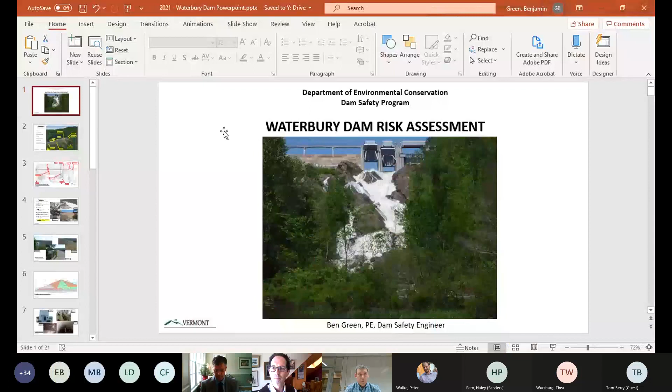Sure, so I'm going to share my screen here. Hopefully everyone can see that. If I get a thumbs up from you, Neil, maybe that's the first I can see right now on my screen. Yeah, so my name is Ben Green. I'm the Chief Dam Safety Engineer for the DEC Dam Safety Program, and this presentation today is about the Waterbury Dam. It will provide some historic information on the dam, a virtual tour of sorts, and discuss some of the preliminary findings of the risk assessment that's currently underway.

As I mentioned, I work for the Dam Safety Program. We're a small program of just 2 engineers in the Water Investment Division within DEC, and we are the caretaker and owner representative at Waterbury Dam, as well as 13 other state-owned dams, including its sister flood control dams, Wrightsville Dam and East Barre Dam. In addition to the dam ownership piece, we also are dam regulators and regulate about 1,000 non-powered, non-federal dams statewide.

As mentioned before, this risk assessment is kind of the first step in a project to address deficiencies at the spillway of Waterbury Dam, which were first identified in the early 2000s. And this work is currently being performed by the good folks at the New England District of the Army Corps of Engineers. I would like to offer to anyone who'd like to learn more beyond this presentation, I'd be happy to, once COVID slows down and the snow's off the dam, maybe later this year, provide a site visit, site tour. Doing this kind of thing online is a little challenging, and if a picture's worth 1,000 words, I think a site visit is probably worth 1,000,000 on a project like this.

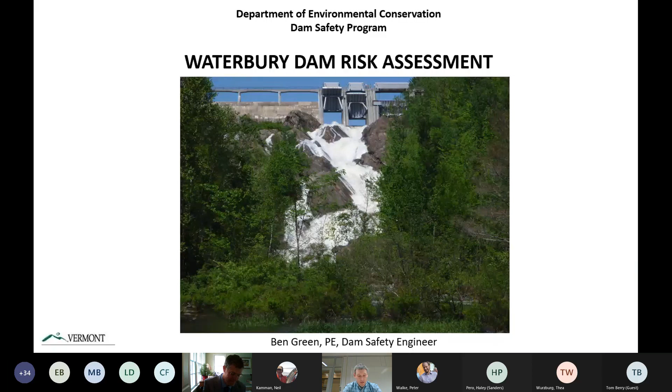So from there, I just want to give a brief overview of the dam. For those not familiar, it is located on the Little River in Waterbury. The drainage area, or area that flows to the dam, is about 109 square miles, and that's mainly located to the north of the dam, with the peak of Mount Mansfield, Vermont's highest peak, as the northern divide. The dam is 187 foot tall and 2,100 feet long.

I'd just like to note a few things in this image here. Hopefully you can see my cursor. This main portion of the dam is called the embankment. Over at this far end is a spillway section that includes 2 components, a gated and ungated spillway section. This red dashed line through the embankment here is meant to show an outlet tunnel that conveys water from the reservoir through the dam and down to Green Mountain Power's hydro plant, as well as a bypass pipe that the state owns. Those are some of the key components. Just to the side of this dashed line, and I'll show it more in the next plan, but it's kind of the original alignment of the river through the dam was through this maximum section right here.

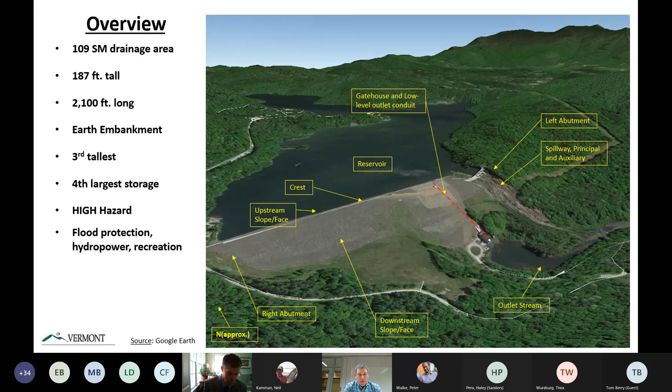The dam is the 3rd tallest dam in the state and the 4th largest from a storage capacity standpoint. So it's a very major dam for Vermont, and it's certainly the largest owned by the state. As mentioned previously, it's a high hazard potential dam, meaning in the event of a failure, it's anticipated there would be loss of life. And the uses of the dam were alluded to earlier: flood protection, hydropower, and recreation.

This slide is from a 1950s plan put together by the Army Corps of Engineers for the dam, showing it in a different light than the previous image. Here on the right end of this image are the two components of the spillway system: the gated portion, known as radial arm gates or Tainter gates, and the ungated section to the left. The dashed line through the dam represents the tunnel that conveys water from upstream to downstream, and on the crest is the gatehouse that intersects that tunnel. At the downstream terminus is Green Mountain Power's plant, as well as a state bypass not well shown in this image.

I'd also like to point out this shaded area, which is actually the original river alignment prior to dam construction at the site. I show this because it's important to understand as you look at this dam. This river alignment is basically a gorge, a cut through bedrock that the river made underneath where the dam is now located. It's been a historic weak point, so understanding what that looks like is important to the overall project.

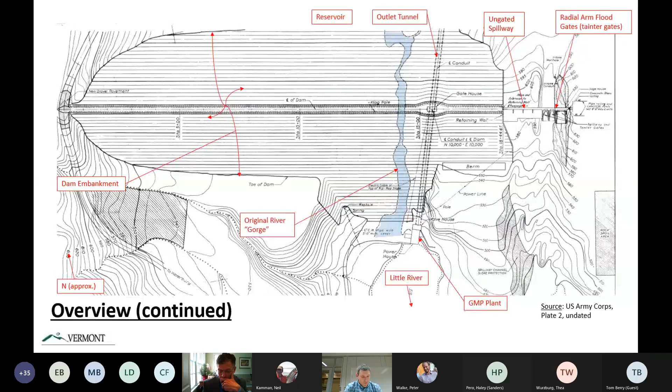So now to back up a little and provide some brief history of the dam. The dam was planned following the 1927 flood that killed 55 people in the Winooski Basin. It was completed in 1938 by the Army Corps of Engineers, designed by the Corps, built by the Civilian Conservation Corps, and then handed over to the state for ownership in perpetuity.

There have been major modifications since original construction, as alluded to previously. In the 1950s was the first one. Due to updated hydrologic studies, the dam was raised slightly, about 3 feet, and a third floodgate was added. Also in the 1950s, Green Mountain Power installed their power plant.

In the 1980s, due to ongoing seepage and leakage issues at the dam, there was a project to remediate some of the leakage and seepage, as well as to add a low-level outlet off of the tunnel of the dam. In the early 2000s, there were further seepage improvements consisting of dewatering wells and a partial cutoff wall installed across that original gorge area. That was a fairly major project.

While that project was ongoing, during a normal test operation of the floodgates, one of the gates got stuck in the partially closed position. This prompted emergency repairs at that time, around 2004, made with a 10-year service life and a recommendation that pursuit of spillway rehabilitation be pursued. That was really the precursor to this project that's ongoing now.

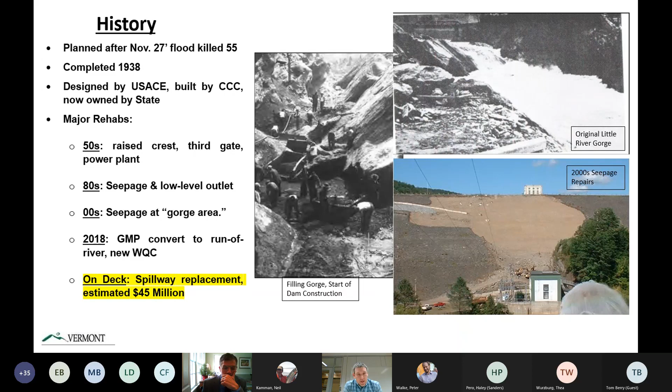In 2018, Green Mountain Power, as part of their Federal Energy Regulatory Commission licensing and water quality certificate, installed new equipment and made operational improvements to make their plant more environmentally friendly. And then on deck is the spillway replacement project, which has a price tag in the $40 to $45 million range. It's not entirely clear if it's going to be a replacement or rehabilitation, but we're just in the early throes of it.

So now I'm going to move on to the virtual tour. Again, it's kind of hard to do these things online with photographs, but I'll do my best.

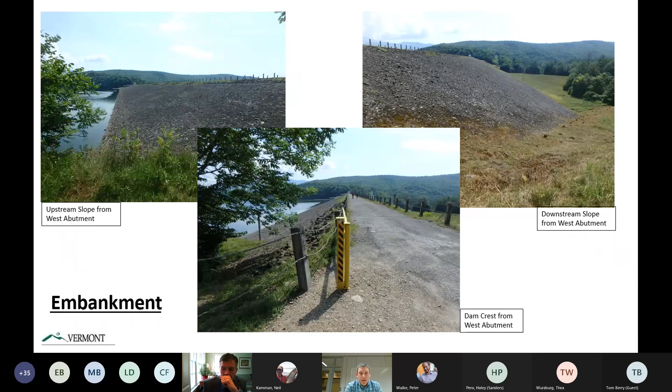Cross section through the dam gives a sense of what it's constructed of. The dam is a fairly commonly constructed zoned earth embankment, where the center is constructed of an impervious or semi-impervious silty clay material, protected on its outer aspects by sand and gravel. On the downstream toe of Waterbury Dam is a rockfill toe, consisting of materials ranging in size from small gravel to Volkswagen-sized stone.

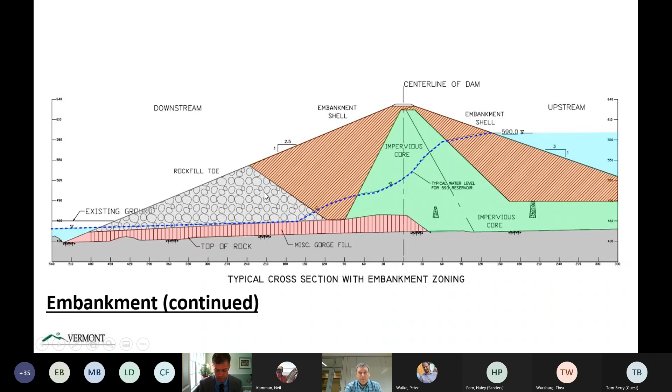Moving on to the outlet works, which are associated with a tunnel. The tunnel's intake is located out in the reservoir about 100 feet below the normal reservoir level. It's a semicircular tunnel about 14 feet wide and 11 feet tall, transmitting water through the foundation of the dam to downstream.

This gatehouse, shown in the image to the left, intersects that tunnel. Within the gatehouse, shown to the right, you can see the Broome or head gate. That gate can be lowered about 130 feet to intersect flow in the tunnel and basically shut it off. It's typically suspended in the open position as shown, but the lower right image shows it in the closed position, obtained during a confined space entry a few years back.

As the tunnel extends through the dam, about halfway between the gatehouse on the crest and Green Mountain Power's plant, there's a transition plate, shown in the bottom right image of the dewatered tunnel.

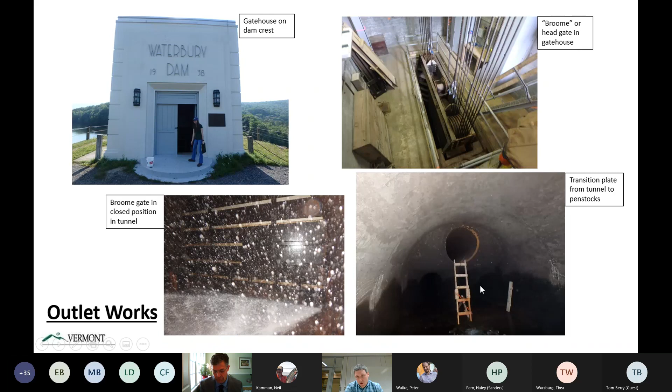We're looking downstream, and you can see three tubes. The two lower are penstocks that transfer water to Green Mountain Power's plant, and the upper is a 48-inch penstock that diverts water to a bypass pipe attached to a cone valve. That's how the state would drain the reservoir if needed for an emergency, operational purpose, or maintenance. Again, the two bottom pipes convey water to Green Mountain Power's plant.

This next image is a video of a test operation of our bypass pipe, hopefully this works for everybody.

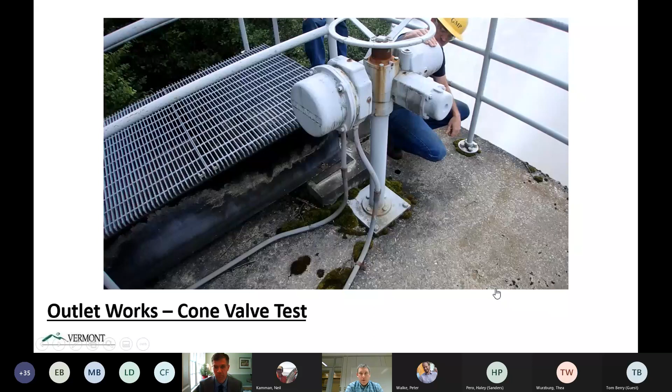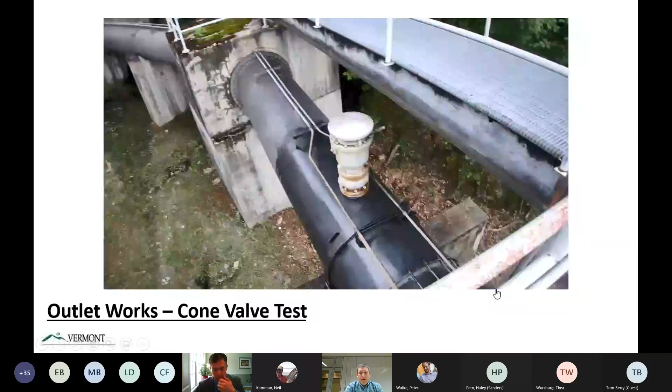It's a cone valve, so basically during operation the gate is opened and it works like a fire hose. It dissipates the flow energy by spraying it out sideways, as you can see here. It's fairly impressive to watch, but that's an example of a test operation of that gate.

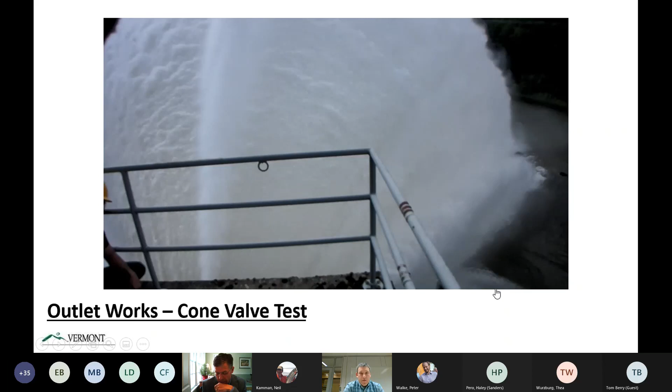Moving on, the dam has multiple seepage collection systems, including a system of dewatering wells already mentioned. It also has a toe drain at the base of the dam, and other diaphragm filters and drains associated with the tunnel. The dam has a long history of seepage issues, so we have a lot of systems to combat that.

The main seepage collection system is associated with dewatering wells. This image is taken on the downstream slope of the dam along the original river alignment. You can see 4 manholes here, each representing a well that extends down through the dam. Within those wells are pumps that intersect and pump out leakage water. These wells operate 2 to 4 hours a day and pump out several thousand gallons of water per day to increase dam stability.

This cross section shows, from the pump house, the wells extending down into the dam and intersecting groundwater as it moves through the dam.

These two images to the right further depict what the original river gorge through the dam looked like, a historic weak point and large focus. The plan in the lower right shows a section of the gorge, roughly 60 feet deep with near vertical to vertical side walls and some overhanging loose rock outcrops. The image in the upper right is of a smaller gorge in the Little River, about half a mile to a mile downstream of the dam, perhaps giving insight into what the gorge looked like prior to dam construction, or at least the closest example that still exists today.

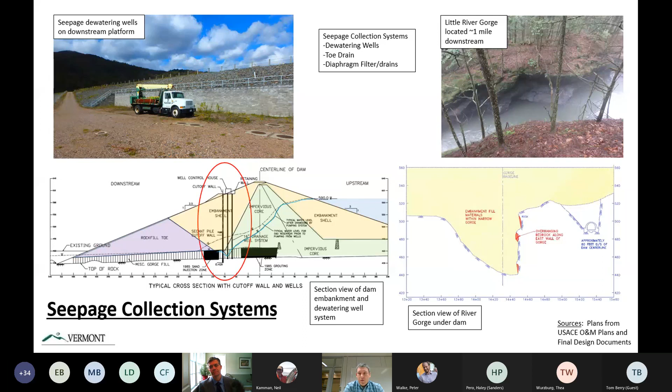Moving on, here we are at the spillways. This is probably really the main subject of the presentation.

It consists of 3 flood control gates, called radial arm gates or tainter gates. There's 2 that are 20-foot wide and 1 that's 35-foot wide. To the right of that is the uncontrolled spillway section, which is 153.5-foot wide.

So the flood control that this reservoir provides is from the invert elevation of the gated section to the invert elevation of the ungated section. That is about 25.5 feet of vertical rise that we can theoretically store in this reservoir to attenuate and store floodwaters from transmitting downstream and causing flood damages.

The gates are operated according to a reservoir regulation manual developed by the Army Corps of Engineers. It dictates that when flooding in the Winooski River down in Waterbury reaches action levels, that's our cue to come up and operate and close the gates. The gates essentially remain closed until the river level in the Winooski drops below the action level in Waterbury.

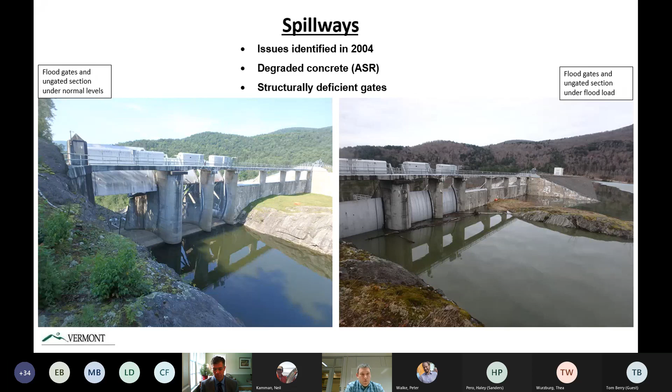This next image is not actually Waterbury Dam, thankfully. It's an image of Folsom Dam in California. I'm providing this to give you some insight into what the failure mode of a tainter gate failure would look like.

This occurred in 1995, and basically the failure mechanism of these style gates is that during extreme loading or high reservoir levels, during attempted operation, the outer struts of these gates can buckle when you try to lift them, and that can be caused by what's called trunnion friction. These gates essentially are fastened to what are called trunnions, or hubs or pins, and they rotate on these pins.

In the past, the friction that builds up on that pin over time was not accounted for in a lot of designs, and so when you go to lift these gates, the friction factor on those pins is much higher than what was originally anticipated. The hoist system would actually overcome the friction and fail the members of the gate.

In engineering design guidance, this type of load had not been widely considered until this failure, and it prompted analysis of many tainter gates throughout the country, including Waterbury Dam, which was found to have the same deficiency.

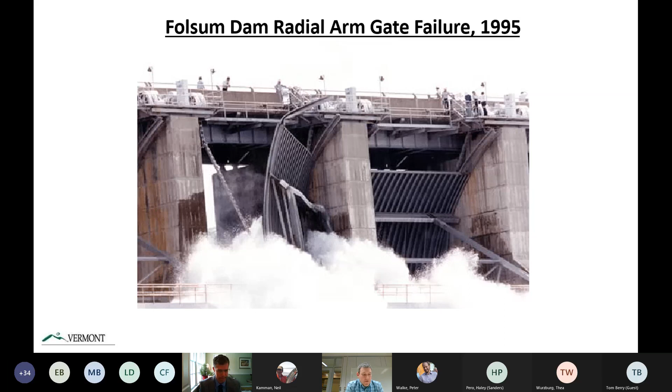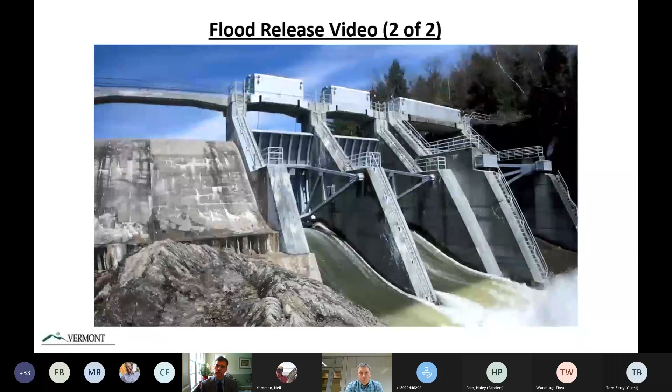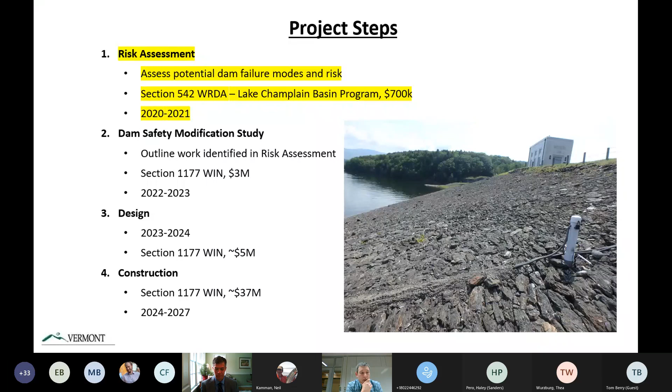Some folks have already discussed what the project steps are. Essentially there are 4 steps, and we're in the first one, which is risk assessment. The objective is to identify potential failure modes and risks associated with the dam, before just charging ahead with what we know is wrong with the spillway, to take a holistic look at the dam entirely to make sure there's not other risk factors that should be addressed at the same time. The risk assessment is wrapping up now, and we're moving into the dam safety modification study, hopefully completed in the 2022 to 2023 timeframe, then we move on to design and eventually construction of repairs to reduce the risk, hopefully completed sometime in the next 10 years.

There's already been some explanation about risk assessment and its objectives, but to restate: this work is being performed by our partner, the U.S. Army Corps of Engineers, specifically the New England District. The risk assessment is being performed by an impressive multidisciplinary team of engineers and scientists from the Corps. As defined by the Corps, a risk assessment is a technical document that assembles and synthesizes scientific information to determine whether a potential hazard exists and/or the extent of a possible risk to human health, safety, or the environment.

A risk assessment includes a detailed evaluation of existing information, plans, records, and data. They perform site visits and some limited engineering computations. It includes evaluation of all components of the dam, and from this process about 50 potential failure modes, or PFMs for short, were developed. These were ways the dam could foreseeably fail, an understanding that allows you to assign risk to each type of failure.

Of the 50 failure types identified, 5 were whittled down to be determined as having the highest risk consequence, while also being possible based on historic performance, observation, data, and evidence. Several of these 5 failure modes do exceed the societal tolerable risk limits.

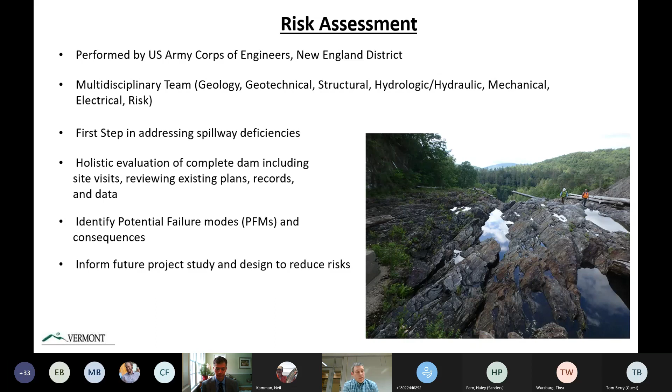A working draft of that risk assessment has been developed by the New England District, and we actually received our working draft of that last week. As I understand, it's still going through, and will be for some time, the Army Corps internal quality control process. But the work to date does support performing remedial actions at the dam, in addition to spillway concerns, and identifies the potential need to address several other issues.

So just to go over some of the potential failure modes that have been preliminary findings from the report: one of them is embankment overtopping. This would take a very major flood event, or could be a lesser flood event where overtopping is caused by debris blockage of the spillways. It's a very high consequence event that would result in a full failure of the dam, but it requires somewhat of a lower probability of loading—it takes such a major flood event to make this happen.

There are several low points along the crest of the dam that could potentially be susceptible to an overtopping event, and overtopping could also be caused by blockage of the spillways. This image to the right is from a recent flood where we had a good amount of debris come downstream. We have a reservoir and drainage basin with a developed portion in the town of Stowe, and a lot of undeveloped, wooded areas that haven't experienced a tremendously large flood in the 80-year history. So there's probably a lot of debris ripe for being moved downstream in a major event—the possibility of debris blockage is real here.

Another failure mode was instability of the ungated section of the spillway. This was actually one of the main risk drivers identified. Basically it determined that the spillway section stability is considered marginal. The spillway can be seen here on the right side—it's a spillway example section from the original plans. The concrete was placed on sloping, poor quality bedrock. It's not keyed into bedrock in any way, and there are no anchors anchoring it to bedrock. It's just the weight of the concrete overcoming the load of the water, both the horizontal load the water projects as well as the buoyant force it projects onto the spillway. So instability of this spillway during a major flood event is a concern.

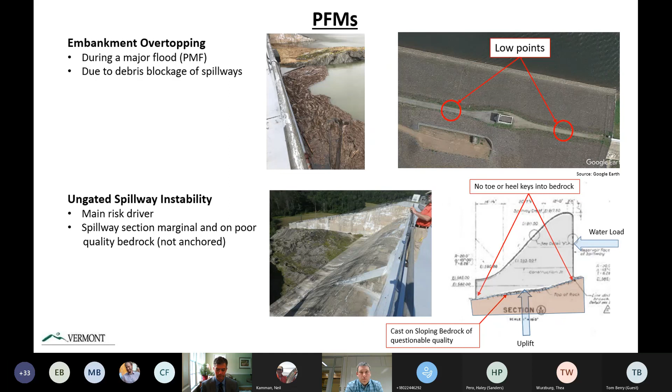Some of the other failure modes is the spillway tainter gate failure. As mentioned before, the gates are considered structurally inadequate for operations during higher flood pools. One of the things that will need to be figured out is whether full replacement of these gates and structures are necessary, or if there's some partial reuse or rehabilitation that can be done to bring these gates into full operation, full capability to store floodwaters.

One thing that should be mentioned is why a failure of a tainter gate would result in a high release, but it would not threaten the remainder of the dam, unlike overtopping of the dam that could result in full dam failure. If the tainter gate were to fail, while it would still be a very bad day at the dam, it would still result in a lot of water going downstream and a fair amount of flooding. It would be considerably less water going downstream than a full dam failure. It would somewhat still be controlled because it would still be going through a spillway section, so the rest of the dam would probably still be safe, and we'd be dealing with quite a bit less flow.

For a comparison, a full failure of the dam has been estimated to be a flow of about 1.3 million cubic feet per second. To put that into context, that's about 425 school buses passing you every second. That's a tremendous amount of water. A failure of the tainter gate would be more in the 30,000 cubic feet per second range, which is more like 10 school buses passing you per second. Still a tremendous amount, but certainly nowhere near as much.

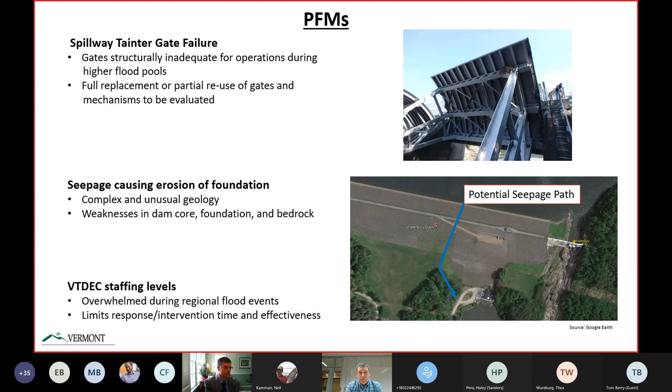So we've talked a lot about risks and issues at the dam. Let's talk a little bit about consequences downstream. In the event of a dam failure, whether under normal conditions, defined as normal reservoir levels and flows, or under major flood conditions, the population at risk, or the number of people estimated to be within those flood limits, occupying homes, businesses, etc., is in the range of 1,800 to 5,000 people. Of that population at risk, it's estimated that life loss could be somewhere in the 60 to 820 people range.

That's based on estimated flood depths and velocities downstream from various conditions. Also factored into that estimate are conditions of the dam failure, like how the dam failed, what the failure mode was, as well as what the notification time downstream was. Is this something that happened, God forbid, hopefully not, in the middle of the night when no one even knew it was happening, or is this something that happened with days or weeks of observation, realizing this was a potential outcome, so there's a lot of time to prepare for evacuation.

It's been estimated that from a property damage standpoint, between 660 and 1,400 structures could be damaged along the Little River and Winooski River, from Waterbury Reservoir all the way down to Lake Champlain, to a tune of $270 million to $850 million in damages. Very major amounts. On a side note, the most current estimate of annual flood benefits is on the order of $3.5 million per year. That basically means that through the existence and operation of Waterbury Dam, about $3.5 million in flood damages are prevented annually.

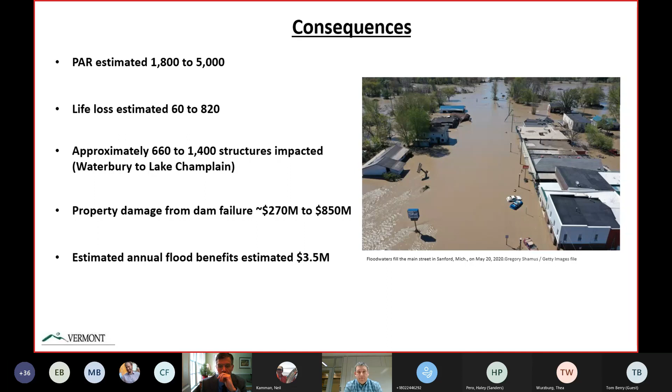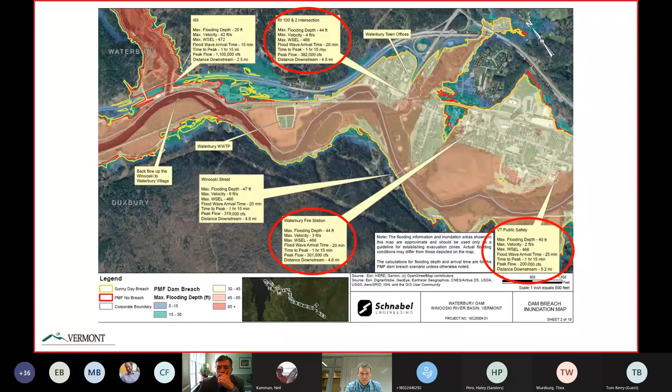What this all means: basically, we're in the first step of a project to address and reduce risks at the dam. Hopefully this project will be completed in the next 10-year range, hopefully even sooner.

The results of the project will be that full flood control capability of the dam will be realized, meaning this dam will be able to safely impound full flood conditions while also reducing risks.

It also means that per the water quality certificate, once the spillway is fully functioning, the ongoing winter reservoir drawdowns — which are now used to store spring floodwaters and reduce load on the spillway — will end, resulting in improved water quality. It further means that through this process we've already learned a lot, and we can continue to learn ways to improve our operations and management of the dam, which should further improve public safety.

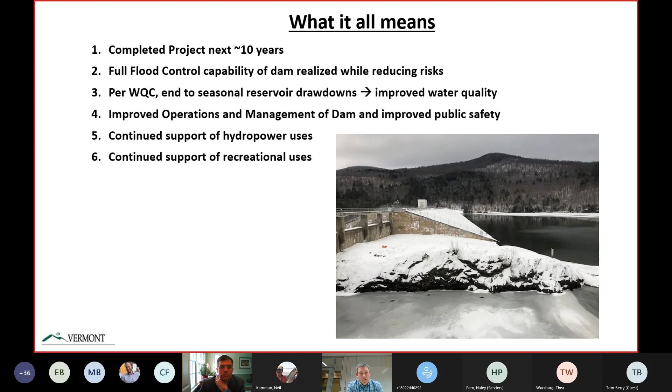It also means this will support continued use of the dam for flood protection, as well as continued use for hydropower and recreation, hopefully for the next 80 to 100 years.

So with that, that's my presentation. Happy to take any questions.